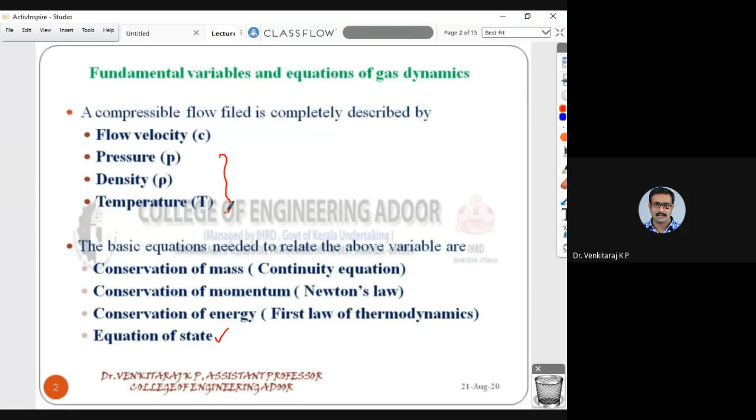It's shown in the slide used here. What is it? P equal to rho RT - this perfect gas equation. So when we say equation of state, there are numerous relations between pressure, density, and temperature.

The equations available in thermodynamics relate pressure, density, and temperature. But the most commonly used equation is the perfect gas equation. Since we have assumed that the fluid under consideration is a perfect gas, it obeys the perfect gas law. So P equal to rho RT is the equation of state utilized to relate pressure, temperature and density of the gas.

The specialty of this equation, or its limitation, is that normally this perfect gas equation is true at lower pressures. At higher pressures, there will be deviations from the perfect gas equation, but in that case also we can approximate - we will assume that the gas is perfect.

So it can be utilized even at higher pressures, to some extent of accuracy. So that is the equation. Besides the three equations mentioned earlier, the fourth equation we take in compressible flow is the equation of state.

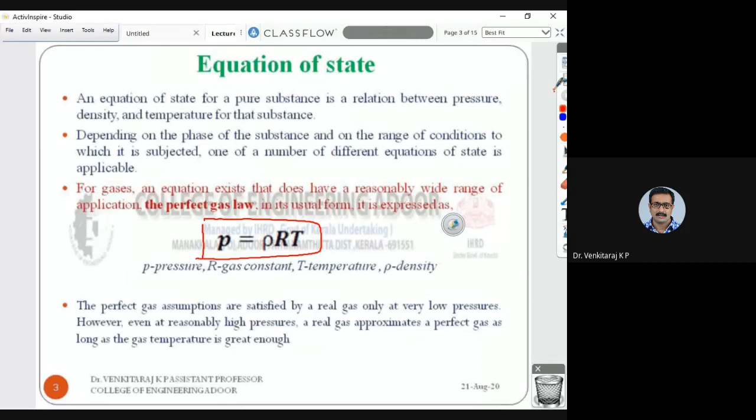Now let us see how a differential form of this equation is obtained. We said P equal to rho RT. In some cases, when we analyze or derive some equations, we will need the equation in differential form.

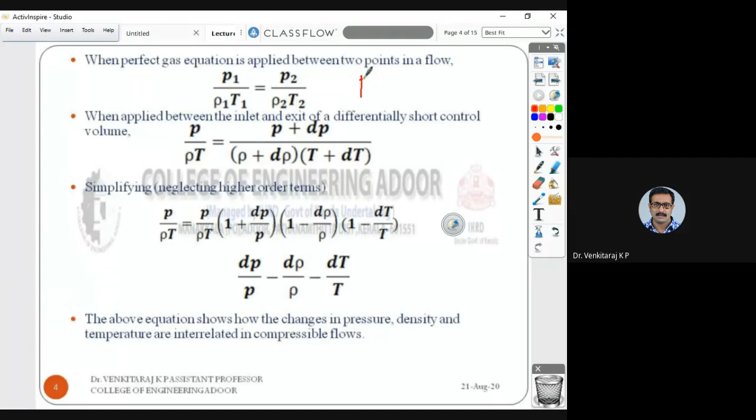To derive our differential formula, we already have pressure equal to rho RT. So we can say R equal to P by rho into T. Where what is R? What is R? For a perfect gas, P equal to rho RT constant - R is gas constant.

R is gas constant, so R is a constant. So you can equate the values at two sections. R is P1 by rho1 T1, that will be same as P2 by rho2 T2, since R will be a constant. So you can apply it at two locations of the flow: P1 by rho1 T1 will equal P2 by rho2 T2.

Suppose you are considering a differential control volume of length dx, with properties at two sections: P, temperature T and rho at one section, and at the other section P plus dP, temperature T plus dT, and density rho plus d-rho.

So you can apply that here. At the inlet section it is P by rho T, and at the exit it is P plus dP by (rho plus d-rho) into (T plus dT).

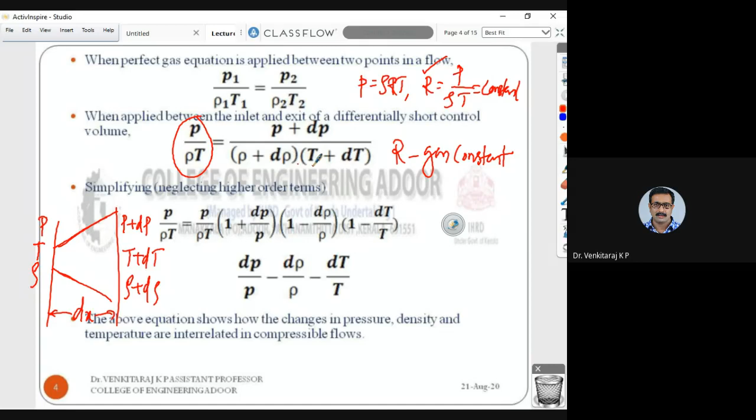Again you simplify it. While simplifying, you neglect the terms which have products of smaller quantities - so we expand the product of d-rho into dT.

Such terms that come up, you discard them all. Discarding means that d-rho, dT, and similar terms are smaller quantities. Product of smaller quantities will be smaller than the individual quantities, so we can approximate or neglect those terms.

So after neglecting it, you get the simplified form: dP by P equal to d-rho by rho plus dT by T, or dP by P minus d-rho by rho minus dT by T equal to 0. This represents the equation of state for a differential control volume.

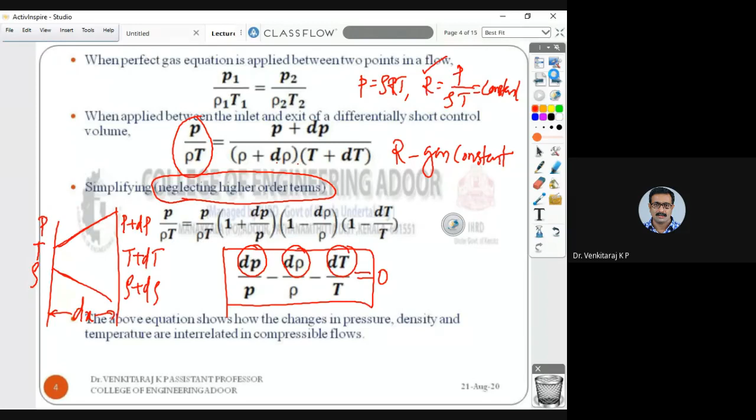Next, let us study stagnation conditions in compressible flow. What is stagnation conditions? We require the properties of the fluid to be compared with some reference state in the flow. When we take a fluid flow, a compressible flow, the fluid which flows will be having...

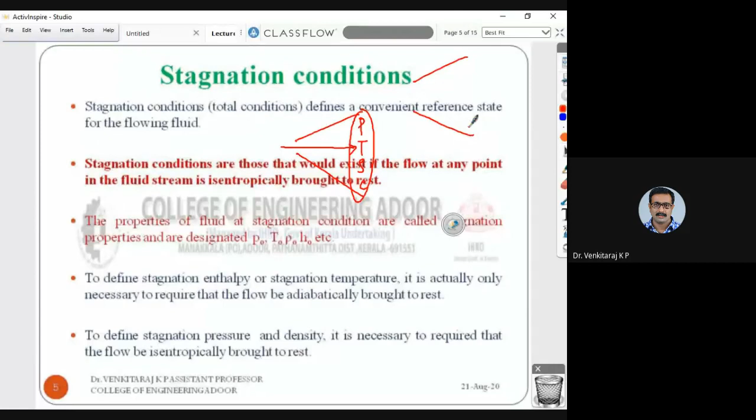Pressure, temperature, density, velocity values at every section of the passage. So you need to relate these static properties. The properties at any section of the flow, we call static properties. The static properties at that point are pressure, temperature, and so on.

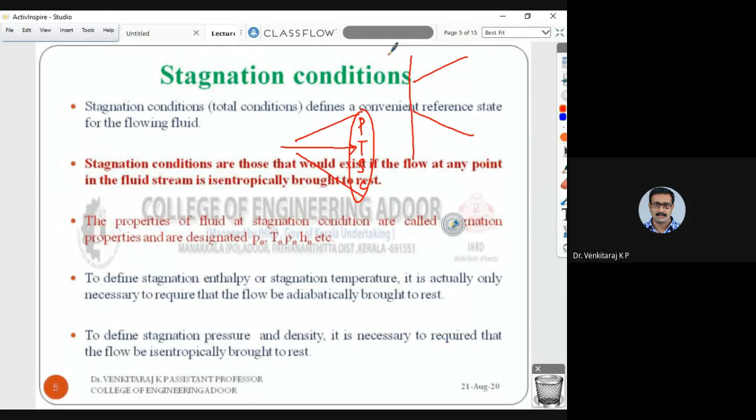So we require to relate these static properties to some reference properties. To define a reference set of properties, we have the stagnation conditions or stagnation state defined for a flow. So it is a reference state.

So what is stagnation state? What is the condition called stagnant? What do you mean by stagnant condition? What does it mean when flow is stagnant? What do you mean by saying that the flow is stagnant?

Flow velocity is zero - that is stagnation state. So stagnation state is the state with zero velocity. That means the flow comes to rest at that point. The definition states: the stagnation conditions are those that would exist in the flow if at any point the fluid stream is isentropically brought to rest.

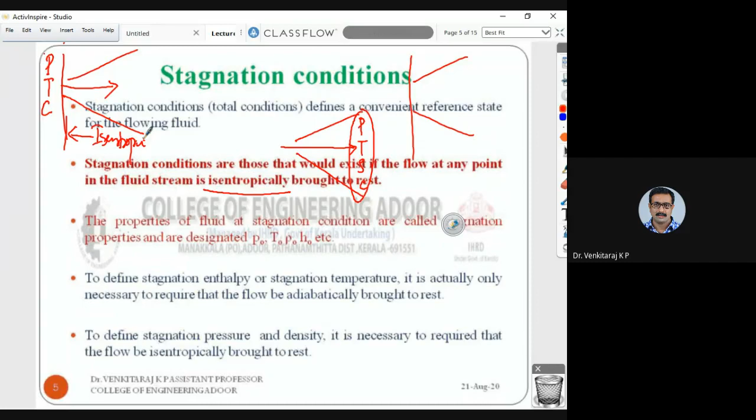So you have a fluid flow, and you have the set of values at one section: pressure, temperature, velocity, etc. Suppose the flow process happens isentropically - the flow is isentropic - and if the velocity at any point, suppose at another section, velocity c equal to 0. So you have decelerated the flow isentropically so that velocity at that section becomes zero. Then that state is called stagnation state.

The word 'isentropically' is important here. We could decelerate by any other method - the flow process could be isentropic, isothermal, adiabatic, isobaric, isochoric. So the stagnation state is the state attained by decelerating a flow to zero velocity, and that process is isentropic.

And also you can add one more term: zero elevation. That is not mentioned here, but you can say zero elevation - to eliminate the potential z term, this is also often included. So stagnation condition is the state attained by decelerating the flow isentropically to zero velocity, or isentropically brought to rest. That is the condition known as stagnation state or stagnation condition.

And the properties at the point where velocity becomes zero are known as stagnation properties. The pressure at that location - for notation, if a property is p, its subscript becomes 0: temperature T0, density rho0, sound velocity a0. So these notations are used to represent the fluid properties at the stagnation point in the flow.

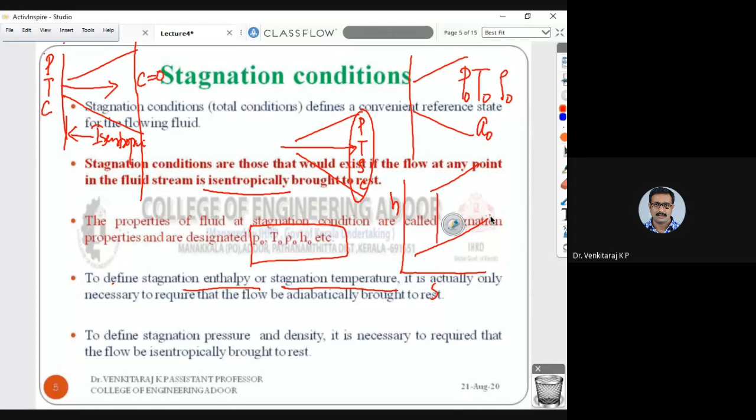State 1 and state 2. This vertical line represents the isentropic path, but in the actual case it will be deviating. So this is 2s and 2. In thermodynamics you usually draw 1, 2s and 1, 2. Here this vertical line represents the isentropic process, and the second line represents the adiabatic process. Adiabatic means friction comes in, but still the process will be adiabatic. Adiabatic means there is no heat interaction outward or inward, no heat interaction between the system and surroundings — that is what adiabatic means. If it is reversible adiabatic, the entropy change is zero, which means the path will be vertical.

So, to define stagnation enthalpy and stagnation temperature — in our statement we need not say isentropic, even if an adiabatic process is used, it will be attaining the stagnation condition. But when you define stagnation pressure, stagnation density, etc., you have to say that the process or the flow is isentropically brought to rest. In the other case, saying adiabatic is enough. So know that difference — what is adiabatic, what is reversible adiabatic, what is stagnation property, what is stagnation state.

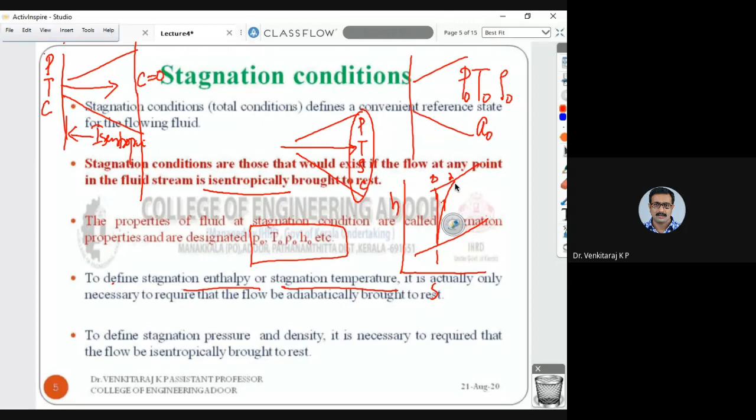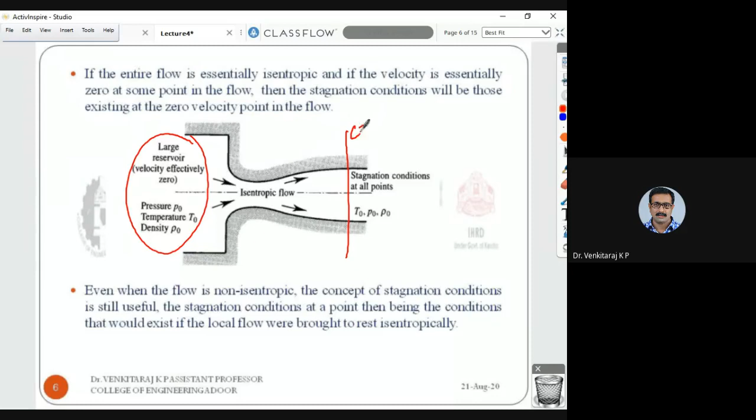So here we have a figure with a large reservoir. When we normally state conditions for a large reservoir, we assume the fluid inside will be at rest. So whatever condition exists in the reservoir, that will be considered stagnation. And if we have an isentropic flow, then at any particular section, suppose at this section C equals 0, then the conditions existing at that point will be the stagnation state. So this figure shows that throughout the flow is isentropic.

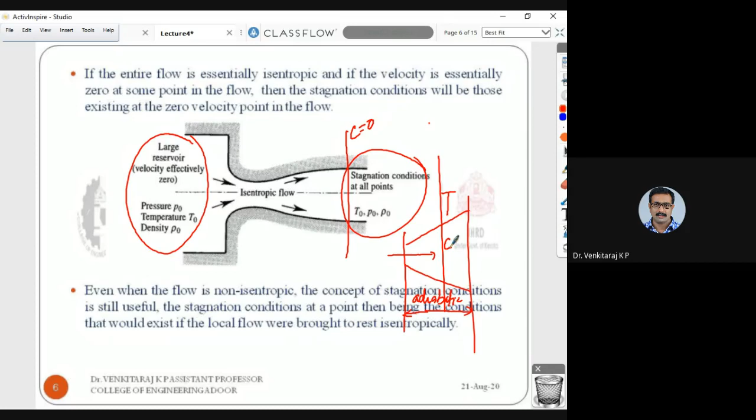That is what I said at first — stagnation condition is a reference condition used to relate to the actual conditions of the flow. Now let us derive the equations for stagnation properties. The first one is stagnation enthalpy. By definition, stagnation enthalpy of a fluid is its enthalpy when it is adiabatically brought to rest — to define stagnation temperature you need to say that the fluid is adiabatically brought to rest.

So this is the definition. Now we need the adiabatic assumption — we have already derived this adiabatic energy equation. We discussed this adiabatic energy equation yesterday: H2 minus H1 plus (C2 square minus C1 square)/2 plus g into (Z2 minus Z1) equal to 0. This is the adiabatic energy equation derived yesterday. Let us assume Z2 equal to Z1 — there is no elevation difference, or this third term will be small compared to the other terms, so we neglect this third term. So we assume there is no elevation difference between sections 1 and 2.

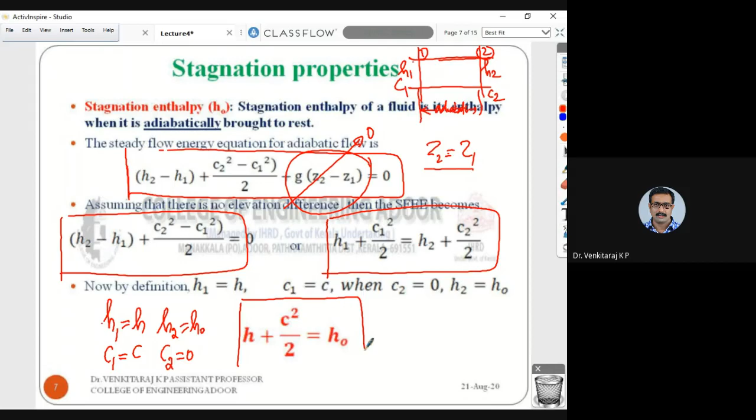So you have one equation for stagnation enthalpy: H0 equal to H plus half C square. This is a constant. So H plus C square by 2 equal to H0 is the stagnation enthalpy equation. To find stagnation enthalpy, what do we need? H is static enthalpy, and H0 is stagnation enthalpy. So H plus half C square equal to H0 gives the stagnation enthalpy.

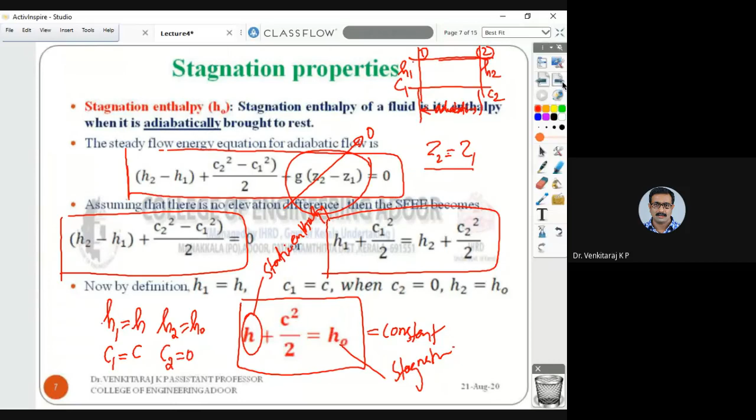Now let us define the stagnation temperature. All these definitions follow the same statement pattern. If we rewrite that property term, stagnation temperature of a fluid is its temperature when it is adiabatically brought to rest. The flow process is adiabatic. So we will derive this. We just got the equation for stagnation enthalpy, H0.

H0 equal to H plus half C square. Now, enthalpy of the fluid is related to temperature: H is equal to Cp into T. Substituting this, we get Cp T plus C square by 2 equal to Cp into T naught. Rearranging the terms, we get the stagnation temperature equation: T naught equal to T plus C square by 2Cp.

So stagnation temperature T naught is our stagnation temperature, and T is the static temperature. So stagnation temperature equals static temperature plus another term, C square by 2Cp. This C square by 2Cp term, we express as a velocity temperature term -- equivalent to the kinetic energy expressed as a temperature.

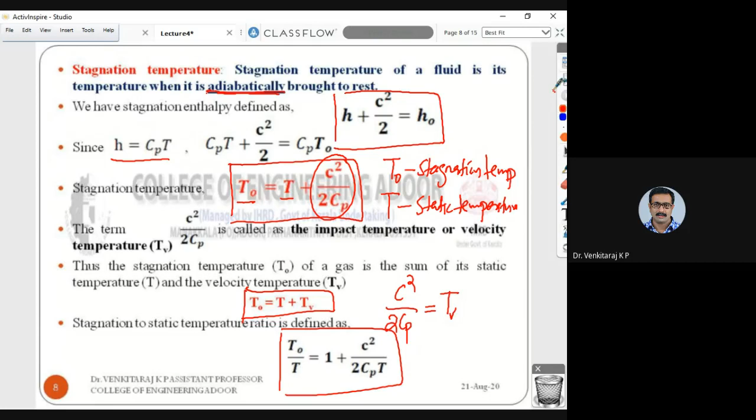But you can define a ratio T naught by T. You bring this T to the left hand side. T naught by T will be equal to 1 plus C square by 2Cp T. We have defined the ratio T naught by T equal to 1 plus C square by 2Cp into T.

Now, this thermodynamic relation -- Cp and gamma R are related. Cp is defined as gamma R by gamma minus 1. Substituting for Cp in this equation, we get T naught by T equal to 1 plus gamma minus 1 by 2, C square by gamma RT. Substituting Cp in terms of gas constant, gamma R by gamma minus 1, into that equation, after substitution, the denominator becomes a term gamma RT.

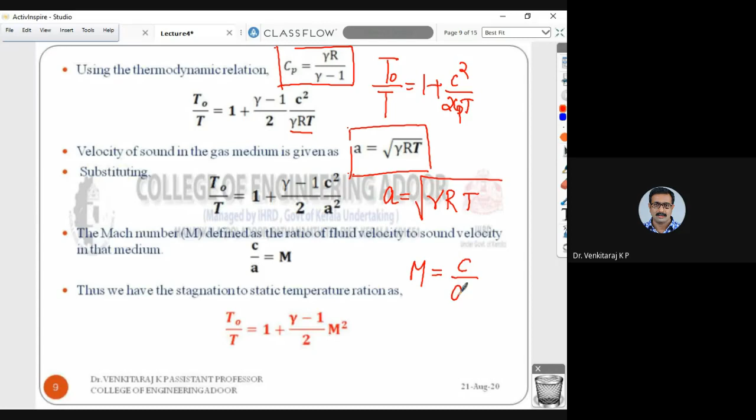So you can write this as T naught by T equal to 1 plus gamma minus 1 by 2, C square by A square. Now, in the previous class we defined the Mach number. What is Mach number? It is object velocity or fluid velocity divided by sound velocity. So C square by A square can be written as M square. Finally, you have one equation for the stagnation to static temperature ratio: T naught by T equal to 1 plus gamma minus 1 by 2, M square.

These rounded equations will be needed for you to solve problems. All these equations are available in your data book. The simple equations you can remember. In the next modules, second and third, the equations will be a bit lengthy -- you are not required to remember them. You can refer to the data book and solve the problem. So T naught by T equal to 1 plus gamma minus 1 by 2, M square.

Suppose you get the ratio of static to stagnation temperature at a section: T naught by T will be equal to 1 plus gamma minus 1 by 2. If you have the Mach number value at that section, you can get the stagnation and static temperature values at that point. So T naught by T equal to 1 plus gamma minus 1 by 2, M square.

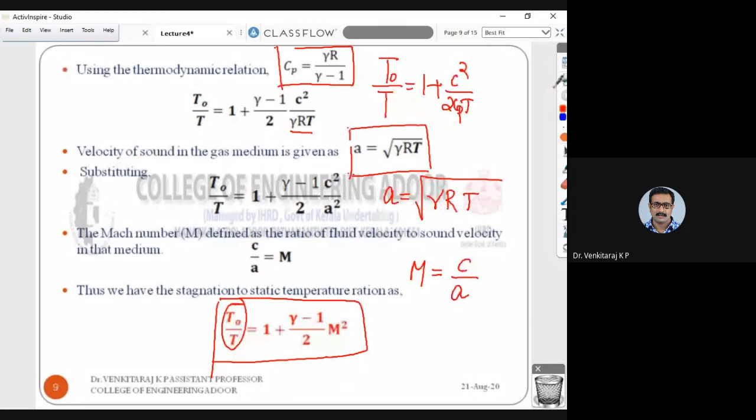Now the third property is stagnation pressure. How do you define it? Stagnation pressure of a fluid is the pressure when it is brought to rest isentropically. Underline the term isentropically, because only for enthalpy and temperature you say the process is adiabatic; for all other properties, the process must be isentropic - reversible adiabatic only. If there is friction, we cannot use stagnation pressure in the derivation. So the stagnation pressure of a fluid is the pressure when it is isentropically brought to rest.

We have already derived the T0/T relation, which you can use to get the stagnation to static pressure ratio, because you have studied the isentropic flow equations in thermodynamics: P1/P2 equals (T1/T2) to the power gamma by gamma minus 1. Since we already have the T0/T relation, we can use this equation to get P0/P. So P0/P equals (T0/T) to the power gamma by gamma minus 1, which is 1 plus (gamma minus 1)/2 times M square, to the power gamma by gamma minus 1. This equation gives the relation between stagnation pressure and static pressure, where P0 is stagnation pressure and P is static pressure.